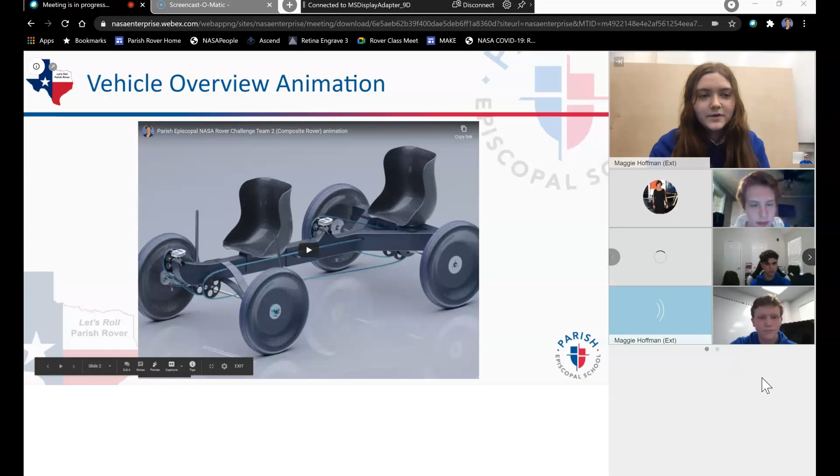To start off, we have an animation of different various components of the rover, and we're going to speak over them. This animation was made by student Luke Camp.

The material that the rover is made out of is carbon fiber 3K twill. The length is 98 inches, the width is 52 inches, and it weighs 129 pounds. The driver configuration is one seat behind the other with both facing forward.

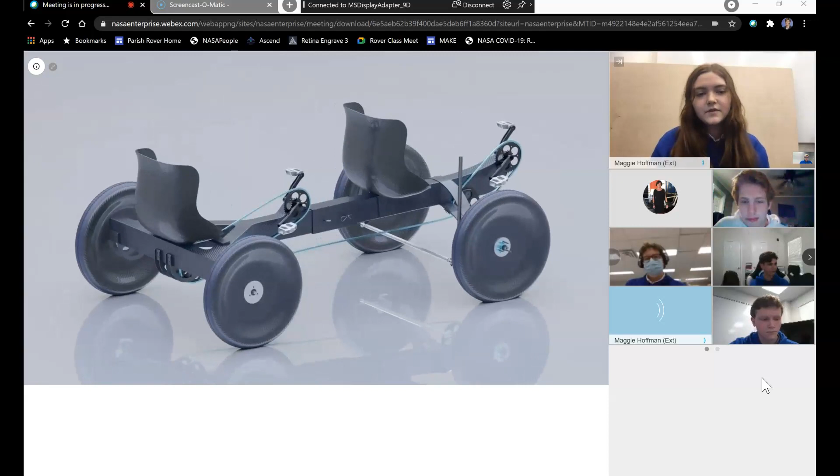The frame is configured of two foam halves wrapped in carbon fiber. This consisted of 7 layers of carbon fiber, which varied in carbon fiber tape layers - 3-inch wide carbon fiber tape that was wrapped around foam, and then 4 full layers of carbon fiber. More layers were applied to areas that have high stress and in the past have proven to be more weak, such as joints. This frame was also vacuum bagged to prevent sharp edges and to make sure that epoxy is spread evenly throughout the frame.

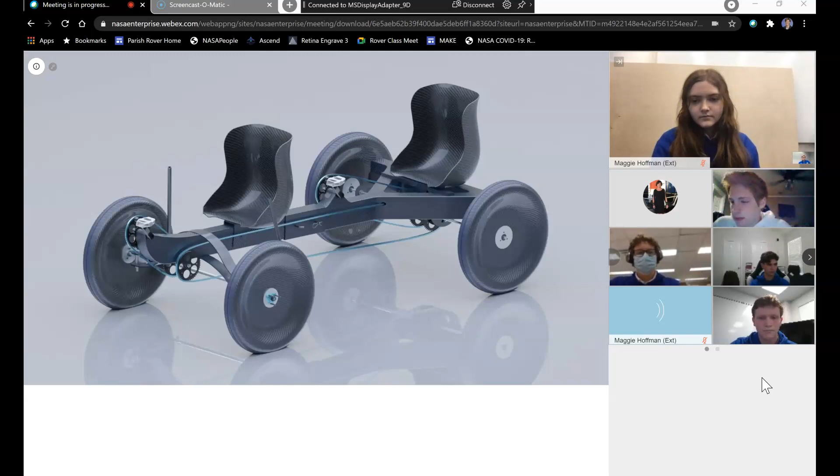To meet our volume constraint of the 5x5x5 cube, the rover has to fold in half. To do this, the original plan was to use a sleeve that would go over both halves of the rover and then use 2 hitch pins on either half to keep it in place. However, the group ran into a problem where there was excess space between the sleeve and the frame.

To fix this, originally the plan was to take urethane pads and stick them in this excess space. However, this ended up causing friction that made it difficult to assemble and disassemble the rover quickly. To solve this, we finally came to the solution of using urethane to adhere the sleeve to the back half of the frame permanently, and then using a single hitch pin that will keep it in place on the front half.

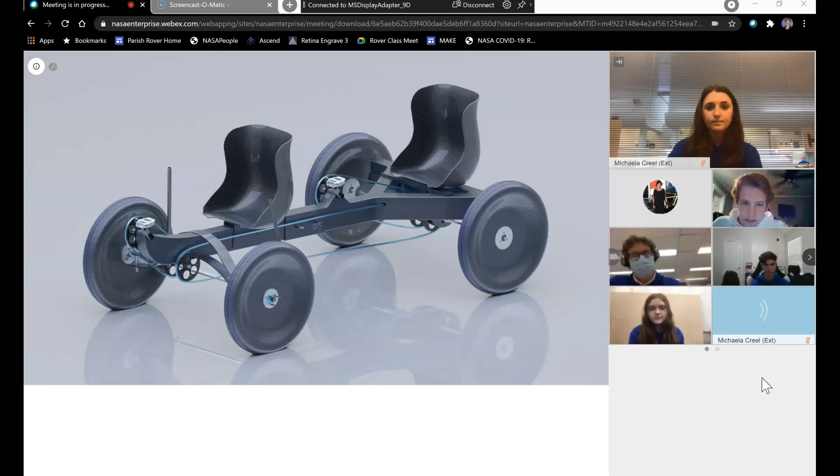This year, each wheel consists of 1 internal mounting flange and 2 carbon fiber halves, which are glued together and then sandwiched by 2 external flanges. Tread is wrapped around the circumference of the wheel.

Each half is made off of MDF molds, which are cut on our CNC. These halves are made of 6 layers of carbon fiber, and then we add triangles to the center to reinforce where the plates are. In the past, we've had problems with the strength of the metal, so we add triangles there to reinforce it.

Each wheel has 2 different types of flanges. There are 2 external, which is 1/8-inch thick aluminum, and then the internal one is 1/2-inch thick aluminum as well. The diameters slightly overlap to reduce pressure, which also helps relieve the stress on the wheel hub, so the center of the wheel does not snap.

Running along the outside, we also have our tread, which is a polyurethane mix, poured onto an HDPE mold, which we design and cut ourselves. Once cured, this takes about 18 hours. Each piece is attached to the outside of the wheel using rapid fuse and painter's tape, which is later removed. Due to all the prep, cure, and dry times, the total process takes about 4 days per wheel.

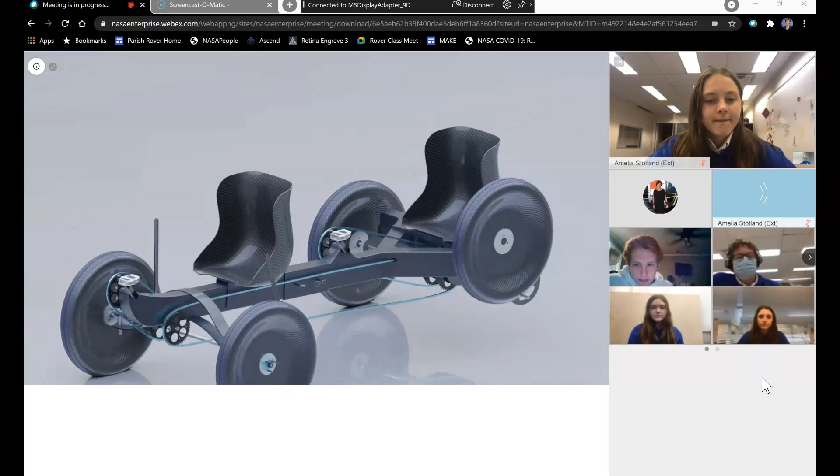This year's drivetrain follows a similar train of thought to last year's, which is a single speed system involving both rear wheels, with the front driver controlling the back left wheel and the back driver controlling the back right wheel. We chose this system this year because it's proven reliable in years past to get the rover over flat stretches of land and navigate through obstacles with relative ease.

The major difference this year is that instead of drilling holes through our frame to attach our axle, we now have plates that hold the axle in place on the back of the frame. These plates were custom made and their purpose is mainly to keep the axle straight so that when we're driving it doesn't bend. This year, the assembly of these plates has gone very well to keep them in place, as well as adjust them on the fly with minute adjustments.

We did run into some problems when we vacuum bagged the frame and it came out with some wrinkles on the carbon fiber. Our first thought was to sand down these wrinkles and then put the plates over, but they wouldn't fit. However, the design of the plates actually allows us to grind down the 1/4 inch side a little bit so that it will fit over the wrinkles even after they're sanded down a bit.

This allowed us to fit the plates on and adjust them as needed to keep the axle straight on the rear wheels. The other problem we ran into was with the chain that goes from the front to the back. Initially it would run over the frame and under it, but since it fit awkwardly and didn't have much slack, we decided we had to drill a hole through the frame instead to tension it.

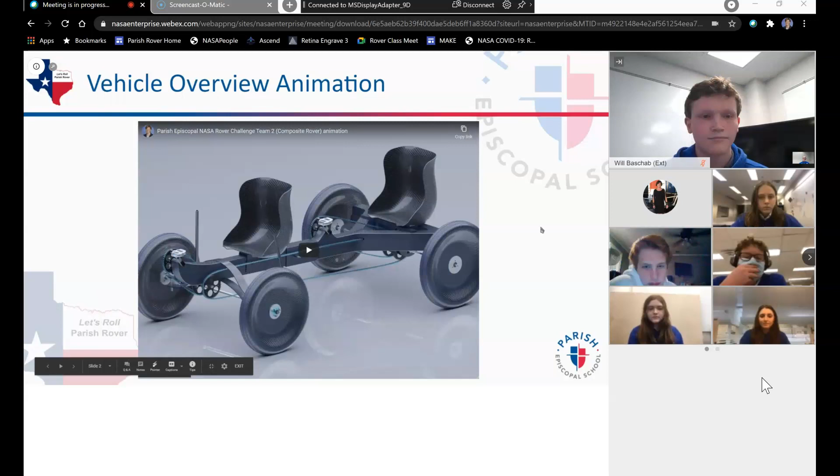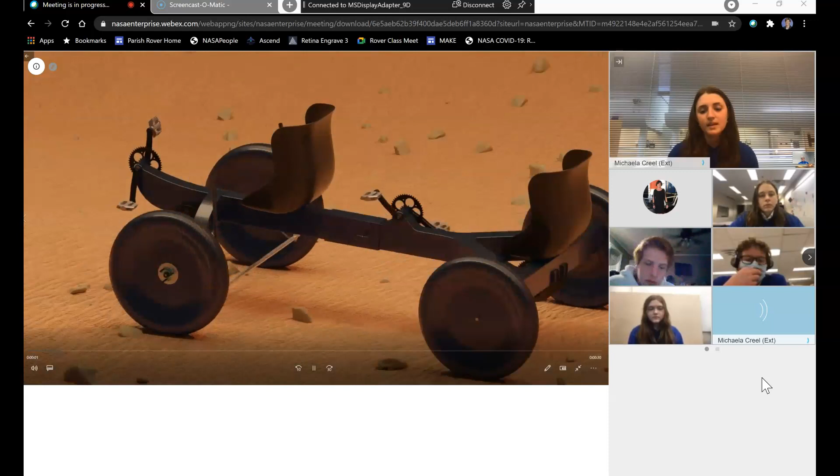Okay, so this next animation - first here is a quick photo of the actual rover in person. The next animation basically goes over the requirements and the rover passing them, such as the 12-inch lowest point, which shows here that our rover fits over 18 inches from the lowest point. It also covers the 5x5x5 cube.

So in addition to what I was talking about with the sleeve earlier, the sleeve must come off for the 2 halves to come apart. The chain must come off of the transfer axle because the sleeve is now permanently attached to the back half.

One part of our team that is significant is that each member has to take a mastery test that goes over the guidebook. That way each member fully understands the requirements such as the 5x5x5 cube, other constraints, as well as the obstacles and tasks that would normally happen during the race.

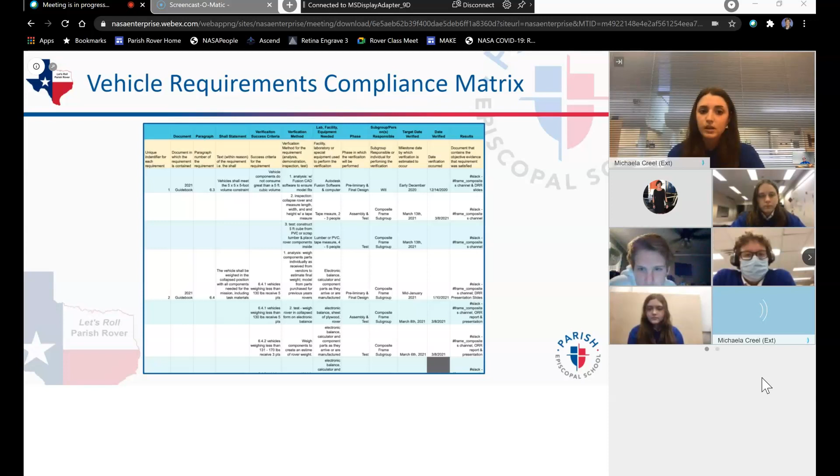So here is our matrix. The team uses a matrix to verify the completion of requirements from NASA's System Engineering Handbook, as well as document when and where these requirements were completed.

Next slide, please. Here are some other photos of requirements, such as the seat belts, as well as driver PPE, including helmets, glasses, long sleeves, etc.

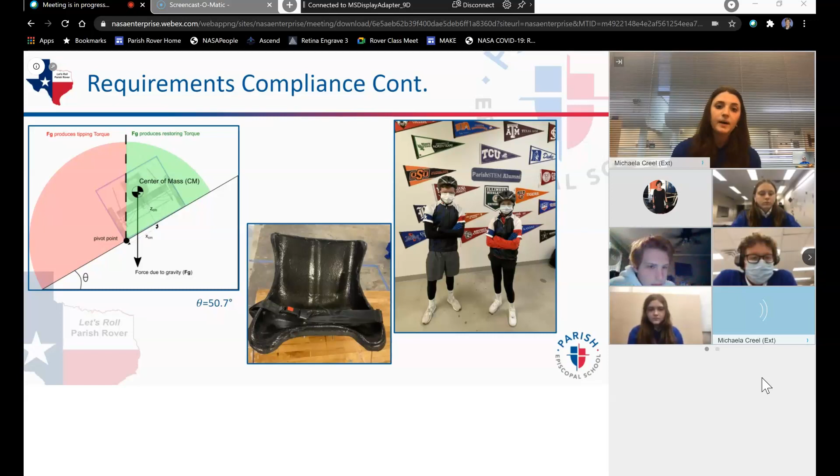On the left side, you can see our free body diagram, which proves that the rover can fit the 30-degree angle incline environment. This shows that this composite rover does fit a 50-degree angle incline, and this can be told by the center of mass still being in the green part of the diagram.

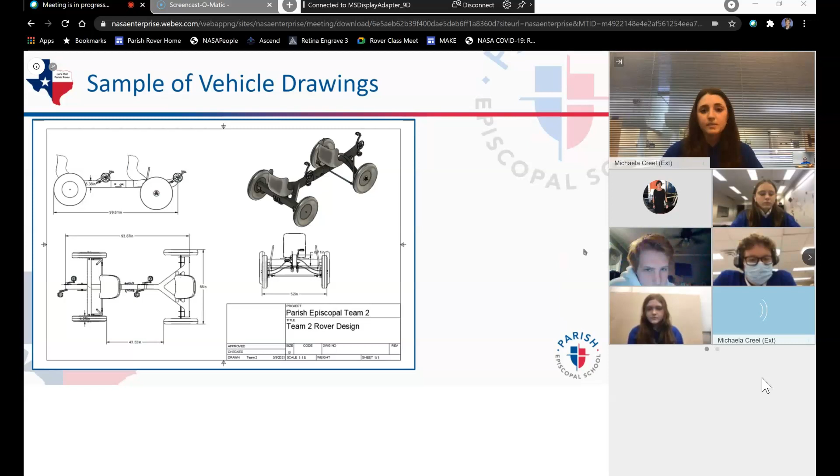And here are some of our drawings. This is just a sample. The majority of our drawings are in the ORR report, and if there are any questions about this, they are welcome at the end of the presentation.

This year, Parish chose to once again pursue the 3D printed design challenge for Task 5. Our design was pretty similar to last year, barring 2 major improvements. One of these was the square hex tube design, which allowed us to get a reliable print without sacrificing any of the stability or strength of our 3D printed parts.

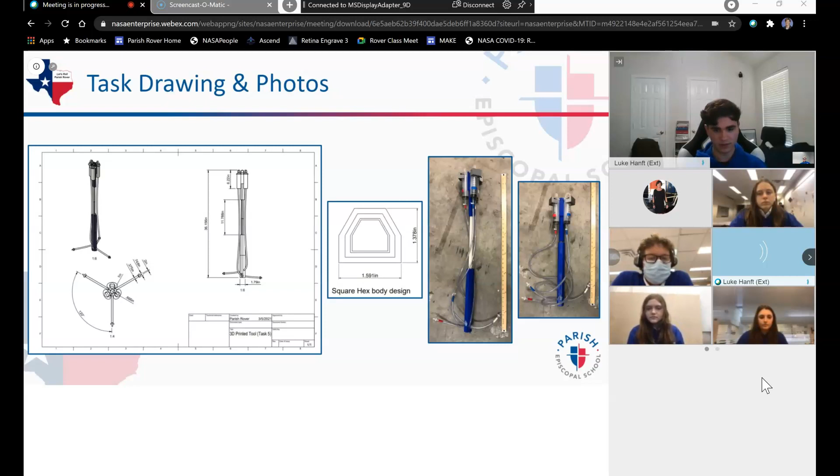The other big improvement was the telescoping action, because last year we had trouble mounting such a long pole. So we decided this year that we would make it telescoping, so that we wouldn't sacrifice any of the driver's reach while performing the task, but make it easier to store on the rover.

And then on this slide here, we have some pictures of our other task equipment.

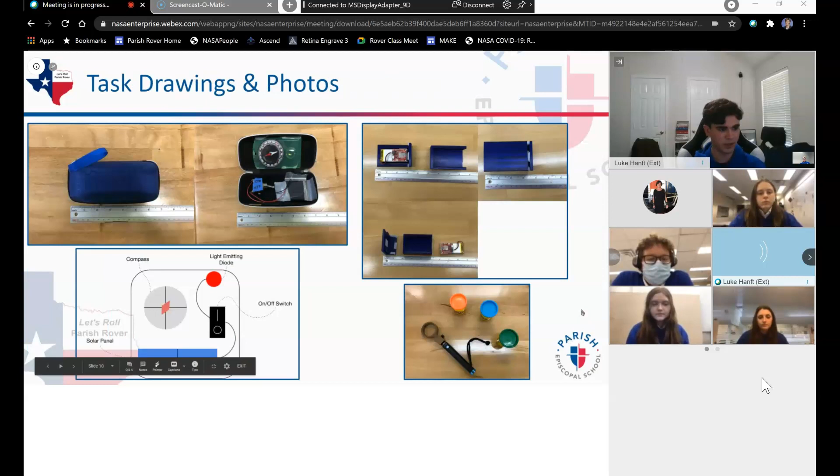For the mission performance predictions, sadly we won't be racing this year, but based on what we know of the course and how we've done previously, and some of the testing we've done with this rover, here are the tasks and obstacles we think we could have completed on day 1 and day 2, with 81 points on day 1 and 94 on day 2.

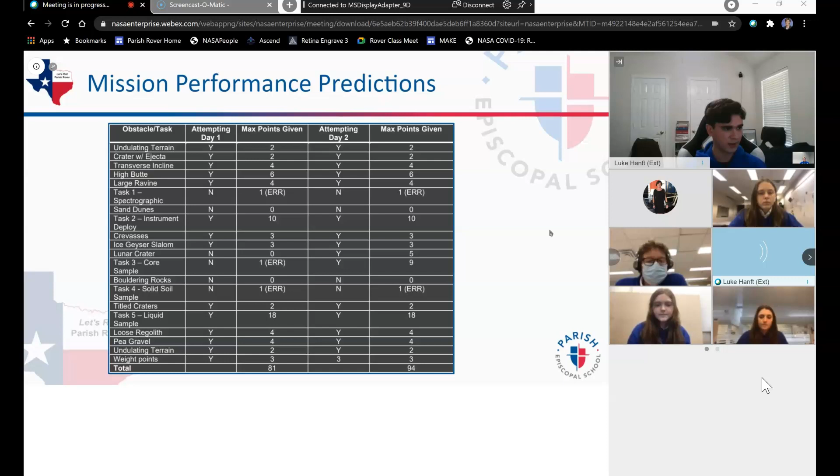So to give a quick update, since we submitted the ORR report, we've been able to test drive the rover once, and a few things came from that test drive. The position that the steering handles were originally in was too far forward for the tie rod to be able to move, so we had to bend the steering handles backwards, which, as you can see from the photo, made driving really awkward and was not an optimal position.

To combat this, the steering handles were moved up further so that they could be at the downward angle without making it awkward for the driver or making steering difficult.

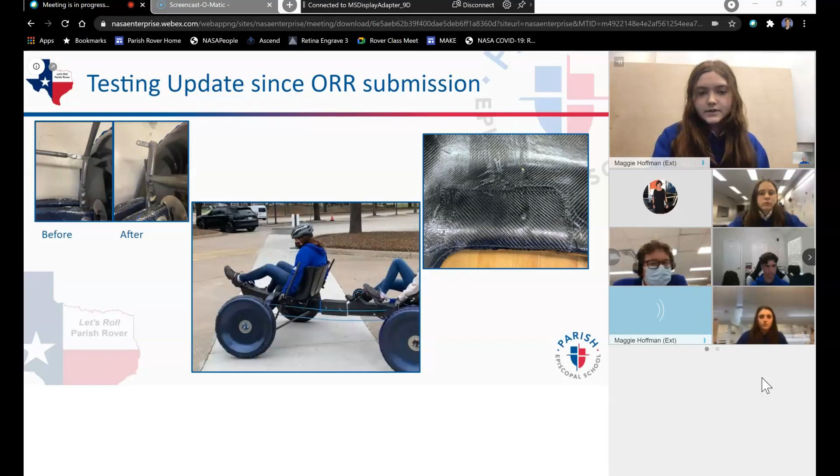Additionally, because of the way the front seat is positioned, there was additional stress on each side since it's only connected in the middle, so the seat did crack. You can see the additional reinforcements that were made to the seat in the slide.

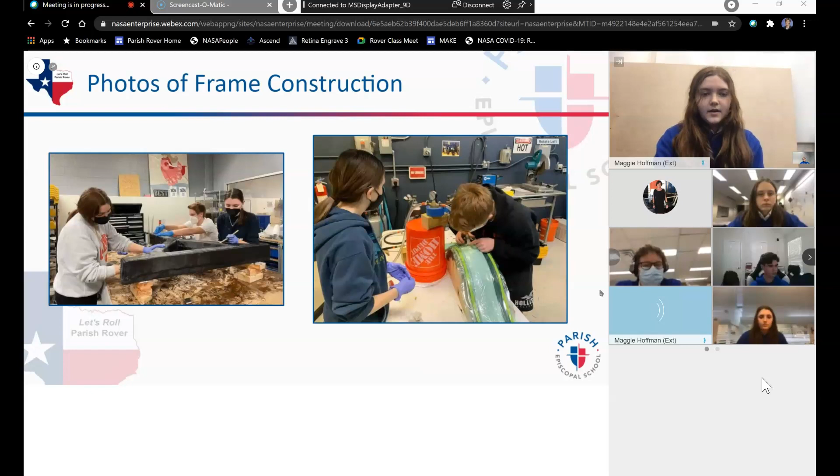Here are some photos of frame construction, and on the next slide, some photos of the completed rover. That was our test drive, and a little bit of collaboration with the team members.

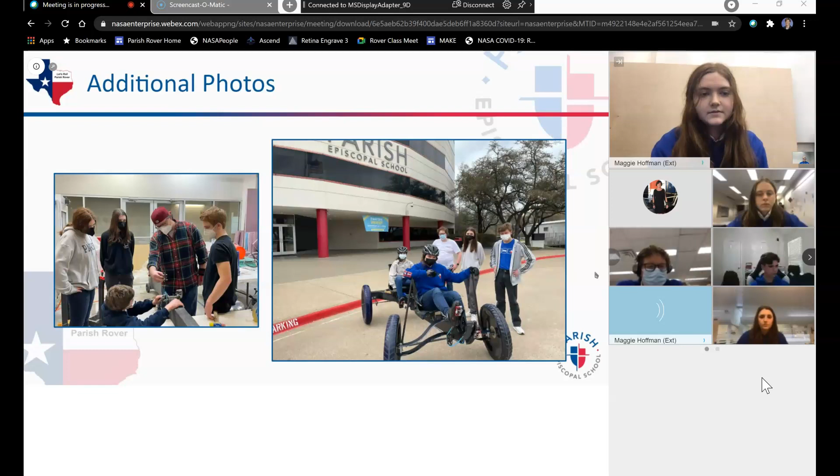For STEM engagement, I had the pleasure of being a Blair Fellow this year, so I had the opportunity to perform various experiments with pre-K through second graders and teach them about STEM and how it related to their other classes and what they can learn through experiments. By doing this with various classes, I was able to reach around 140 students.

Two of our team members also made a blog post encouraging young women to participate in STEM. Finally, the team created a video highlighting members of the rover team and their experiences in middle school STEM classes, encouraging middle schoolers to sign up for those courses. As that was shown to pretty much the whole middle school, it reached 350 students.

Thank you guys so much for your time. We would love to take any questions.

All right, great job, guys. Good report, good presentation, the animation, that was fun. Great job on all that.

So I have a question, and it can be for two of you. Maybe two of you that didn't say anything might be good, but it doesn't matter, any two. From start in the fall to almost finished now, what is the one thing that you're going to take away from this challenge that you're going to carry on either when you go to college or in your other classes? What is that one thing that you're like, wow, okay, yeah, I got this?

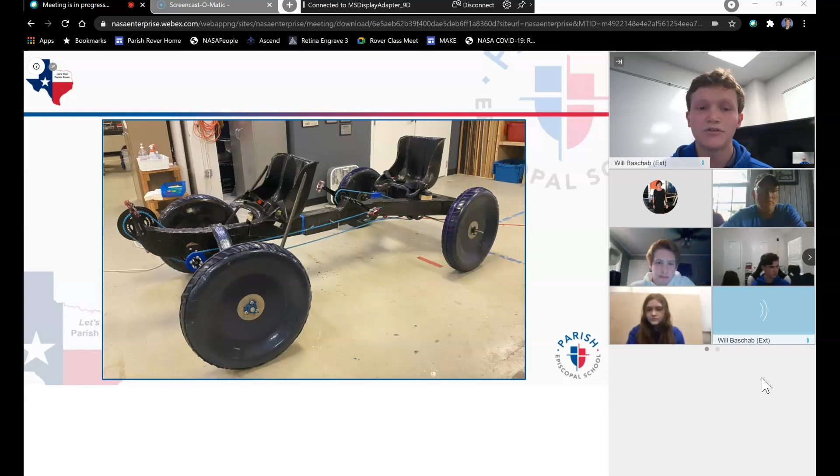To the chain clearance question, those leaf springs designed as the suspension were intentionally curved a lot, so the frame would sit pretty high on the wheels. That was intentional so the chain would sit at a pretty high distance from the ground and wouldn't hit any obstacles. For tensioning the chain, we've looked into using derailleurs and derailleur mounts to run the chain through, and we've also 3D printed chain guides on the rover and sprockets to make sure it doesn't slip off.

You've got a good looking design. I like the carbon fiber frame. That looks good. That's all.

All right, thank you, Scott. Dennis, do you have any questions for the team, sir? Oh, a couple, I think.

So the rover is beautiful, I love it. Some of the most gorgeous rovers I've ever seen have been all composite and finished like that. This is the first one I've seen that had curvature to it, it had style, that's kind of cool. For the STEM engagement, did you have the opportunity to measure the effectiveness of the STEM engagements that you had?

It's become kind of a mantra for educators to quantify the interest or knowledge of students you interact with, before and after. Have you improved their interest? Have you improved their knowledge of the subject matter? It kind of goes along with lesson plans, that kind of thing. You wouldn't necessarily have a formal lesson plan for STEM engagement, but something where you can quantify the effect, whether you've had a significant influence or not.

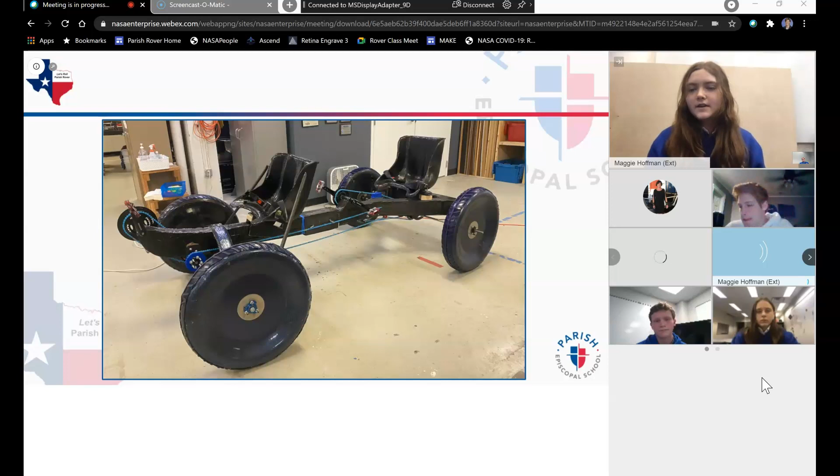For the Blair Fellow program, whenever I go over to classes I'm a part of, I help the teacher with her lesson plans. So the STEM already happens as part of the curriculum. I'm not really sure there's a way to quantify the impact, but I do get to go over there and help them execute certain designs that make sense of certain lessons, with a hands-on component to learning.

For formal education, that's where the exams come in, testing them on the material you hopefully conveyed effectively. I wouldn't hesitate to document what you're doing into the report. The report you have now has a lot of information, but after you submit it here you no longer have constraints on size or page count. Include what you've done, take credit for it, and inform students who come after you of what has been accomplished.

I was also worried about your rover coming apart and coming back together, and how you're managing the belt. I saw a little bit about how you were doing that. It's a requirement that you maintain 12 inches between the belt and the ground. It's just smart, you really ought to maintain that.